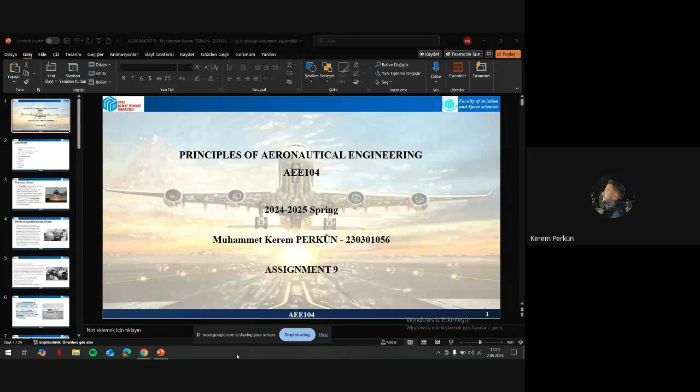Hello everyone, today I'm going to introduce the topic. My presentation covers the historical developments of aircraft propulsion systems, their classification, and the different types of engines used in modern aviation. I'd like to inform you about the style of my presentation. I wrote some specific information about the topic, but I won't read it directly, I'll try to summarize it.

If Kerem, there's no problem, we're just seeing the first page of the presentation. Yeah, I'm aware of it. If there's no problem, let's start with my content part.

Here is the topic that I will mention in the following pages. The first slide will be about the propulsion system. A propulsion system is essentially a machine that generates thrust to move forward. In aircraft, this works through Newton's third law: accelerating gas creates a reaction force to propel the plane, and the working fluid's acceleration through the engine produces this thrust.

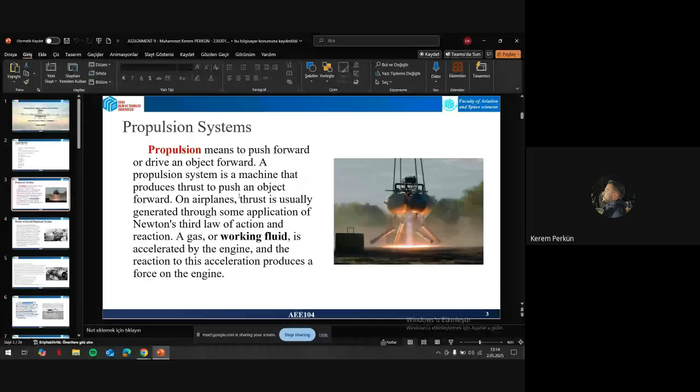Another part will be about historical things. In the early 19th century, powered flight seemed impossible due to inadequate power sources. Early attempts used clockwork and springs, later experiments used steam. Frederick Stringfellow's steam-powered model in 1868 was a key milestone, now preserved at the Smithsonian.

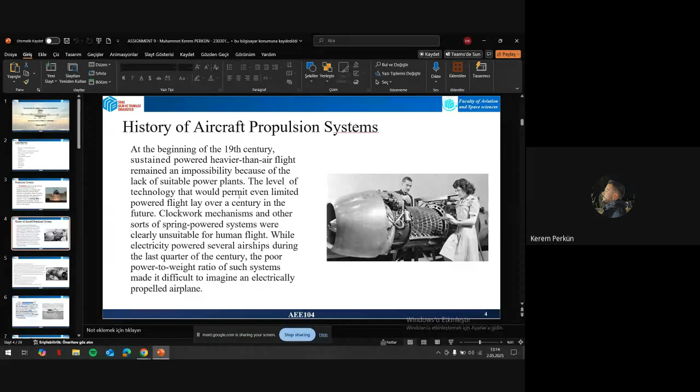Pioneers of flight, visionaries like Mozhaysky, Maxim, and others made early attempts with steam-powered machines in the late 19th century, while none achieved sustained flight. For example, Langley's 1896 aerodrome flew nearly a mile over the Potomac River, proving the concept's potential.

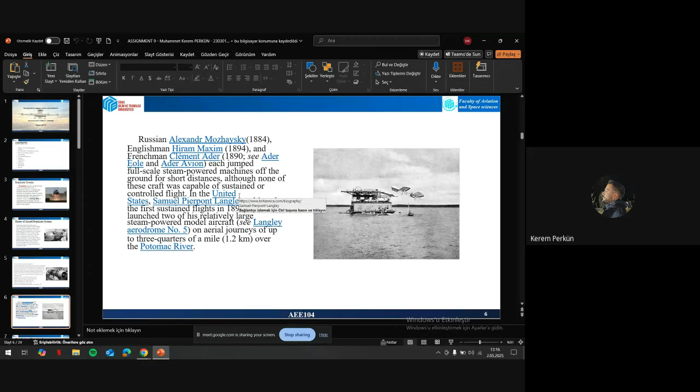And classification of... I'm hearing a sound spot, let me check, one minute. It has to be matched, Tarık actually. Hocam, any problem? I wasn't aware of it if there is one. What is the problem? Tarık says the slide isn't matched with my voice. I don't think it's matched, so right? I can see your slides and hear your voice neatly. Yeah, let's continue.

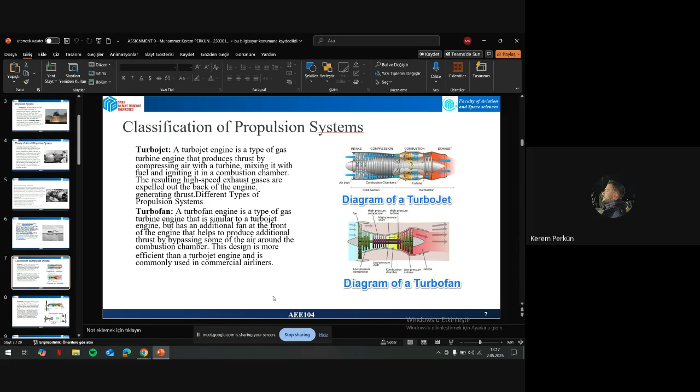The other part will cover ramjets, scramjets, and their classifications. Ramjets compress air using forward motion, working best at supersonic speeds. Scramjets take this further with supersonic combustion. Rockets differ by carrying their own oxidizer, making them essential for space travel.

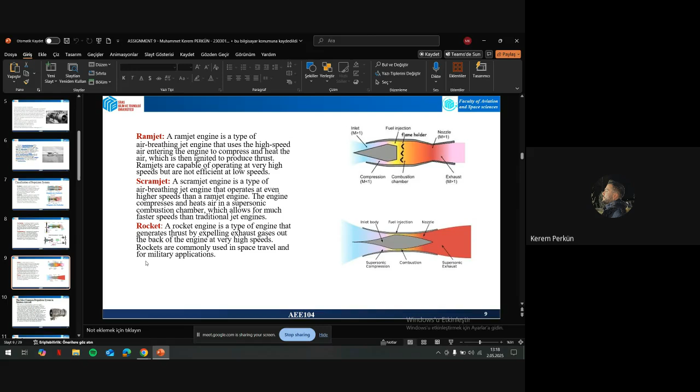Let's talk a bit about the work principles of the combustion chamber. I have a short video about it too, which I'll share after my talk.

First, high pressure air from the compressor enters the combustion chamber. Then fuel nozzles spray a mist of fuel, generally Jet A-1 or avgas - I'll mention what avgas is, by the way. Then a spark plug in a piston engine, or high temperature air in a jet engine, ignites the mixture. After that, the burning mixture produces high energy gases and spins turbine blades in the jet engine.

It generates thrust. Excuse me, Kerem, are you changing the slides? Because it's at least slide number 10 right now, are we okay? Yes hocam, okay, I'm talking about the work principles of the combustion chamber actually. Okay, but you're not showing the combustion chamber to us right now. I'm sorry.

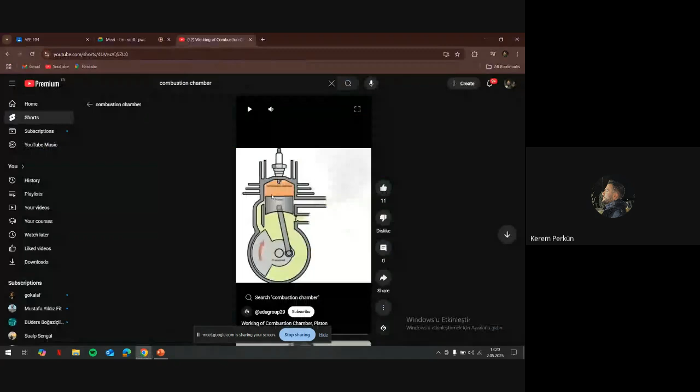You're still watching my screen, right? Yeah, I see a piston in here, and the cylinder. This is the combustion chamber. Let me explain it again if there's no problem.

First, high pressure air from the compressor enters the combustion chamber. Then fuel nozzles spray a fine mist of fuel, generally Jet A-1 or avgas. Then a spark plug in a piston engine, or high temperature air in jet engines, ignites the mixture. The burning mixture produces high energy gases that spin turbine blades in a jet engine, generating thrust, and push pistons in piston engines, rotating the crankshaft. Finally, hot gases exit through the exhaust system, creating thrust or expelling waste.

I just mentioned avgas, so I can explain it. What was that?

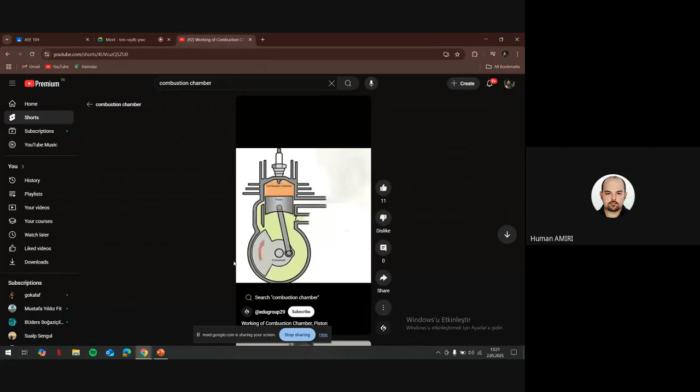Can I ask something here? What you're showing us is a piston engine, right? Is it a piston engine or not? It is a piston engine. So can you tell me if there's an aircraft using a piston engine, or what is the similarity of a piston engine to a jet engine? Can you explain that to us a little bit?

Piston engines actually rotate the crankshaft, but in jet engines it generates thrust. There's a fuel nozzle in the jet engine, and they also use some kind of fuel like jet A1 or aviation fuel. But if you're talking about the piston engine, there's a spark plug. Also in jet engines, they use high temperature air for igniting the mixture gas inside.

So what is actually the difference between a piston engine and a jet engine, in terms of - I don't know if you've taken thermodynamics yet. No, not yet. Okay, I don't have any specific idea of it, but I've just tried.

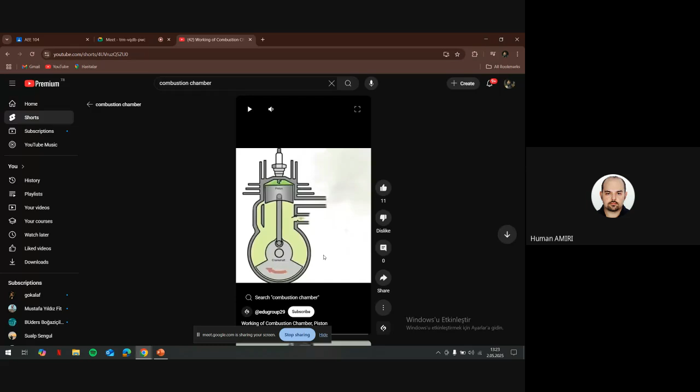So what kind of engine do we have in our automobiles? There are some similarities in car engines and aircraft engines. What are those similarities? Can you explain to us?

Yes, actually the other part of my slide will be about that. If there's no problem, I can continue with that. Yeah, continue. Okay.

Before I start, I want to talk about avgas, which I mentioned on the previous pages. So what was avgas? It's a kind of aviation gasoline that is specialized, a leaded fuel used in piston-powered aircraft engines. It has a high octane formulation, which makes it a bit dangerous for our environment.

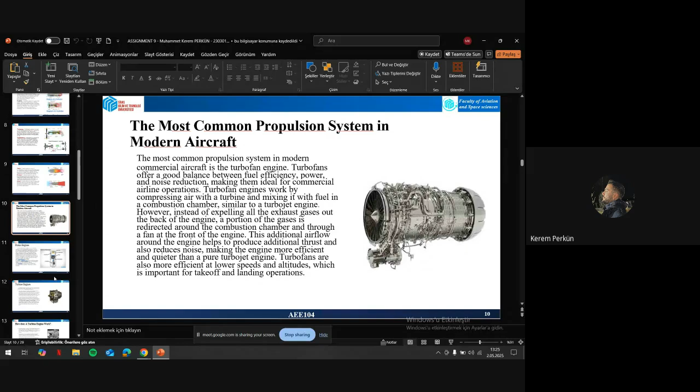Piston or reciprocating engines convert pressure into rotation, similar to car engines, but modified for aviation with dual ignition and air cooling. They typically use avgas and remain popular in light aircraft.

Turbine engines, or gas turbines, are internal combustion engines that continuously burn fuel. Their key components are the compressor, combustion chamber, and turbine, working together to convert energy into mechanical motion. The difference between a piston engine and a turbine engine is that a piston engine works intermittently, but turbine engines work continuously, right?

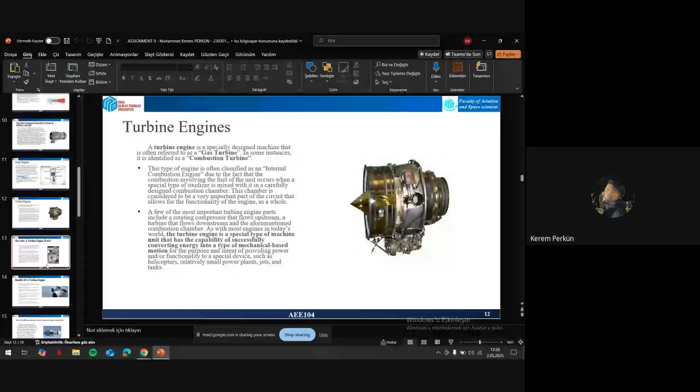Yes. Okay, what do we mean by intermittent working, intermittency in piston engines? Can you show us the slide of the piston engine, okay?

Slide number 11. In this slide you can see there's a cylinder, and inside there is a piston, and this piston is connected through a rod to the crankshaft, like in your automobile engine. There's an intake valve and an exhaust valve. The fuel and air mixture enters through the intake valve, and then with a spark from the plug, it burns and produces energy, which drives the piston to the lower part. When the piston comes to the lower part, it rotates the crankshaft.

Then by the action of inertia, the piston goes back to its first place, and by that time the exhaust valve opens and the burnt gases go out of the cylinder. But this happens intermittently. There's a part where the intake valve opens, air and fuel come inside, and the piston compresses it, then a spark, then expansion.

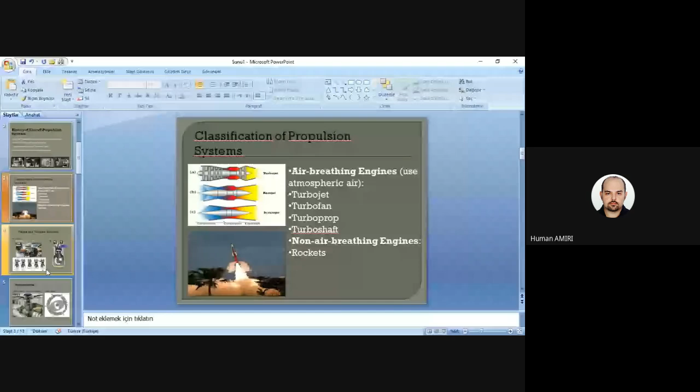Can you stop at slide number 3? Hocam, it remains actually how turbine engines work. If there's a part like this, he can continue with that.

Okay, now I will ask some questions. The first question I have on this slide is about the classification of propulsion systems. So what do you actually show to us right now? Can you explain this slide to us?

Yeah, of course. This slide shows the types of propulsion systems, like air breathing engines and non-air breathing engines. In this slide we see turbojet, turbofan, turboprop, and turboshaft. I'll explain all of them in the next slides.

But for the rockets, like a non-breathing engine, the rocket has its own... how can I say it... one second.

So the rocket, what do we mean by air breathing and non-air breathing? Can you explain? Air breathing means the air comes from outside into the engine and goes with the fuel into the compression and combustion chamber. That's what air breathing engines mean.

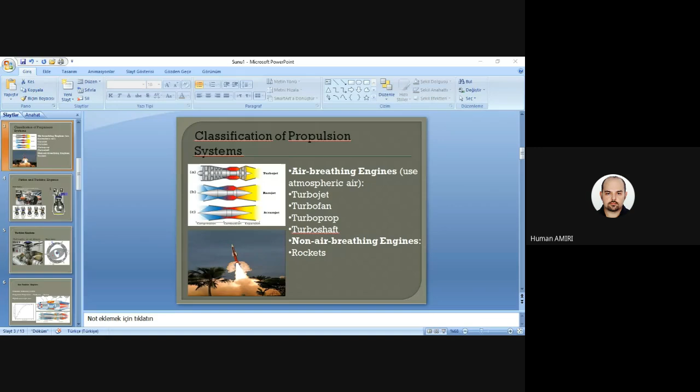They do not have any rotating parts inside them. In a turbojet engine, the parts that rotate belong either to the compressor at the front of the engine, shown by the compression section in this slide, or to the turbine, which is after the compressor. You see a red part, which is the combustion chamber. After the combustion chamber, you see two stages of turbine blades. So at the front part of the turbojet engine, you see a number of stages of compressor blades, and at the back part, you see turbine blades.

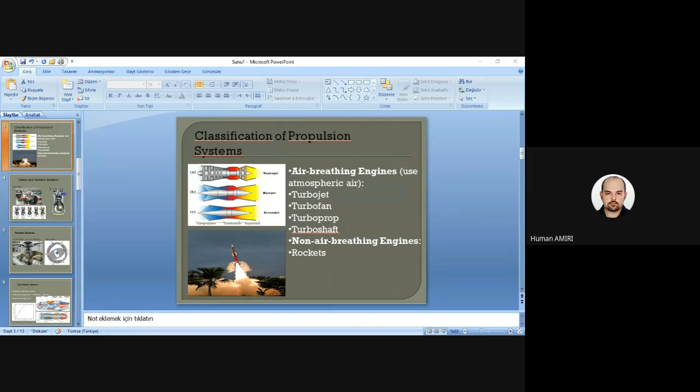Turbine engines are used in helicopters also, like rotary motion.

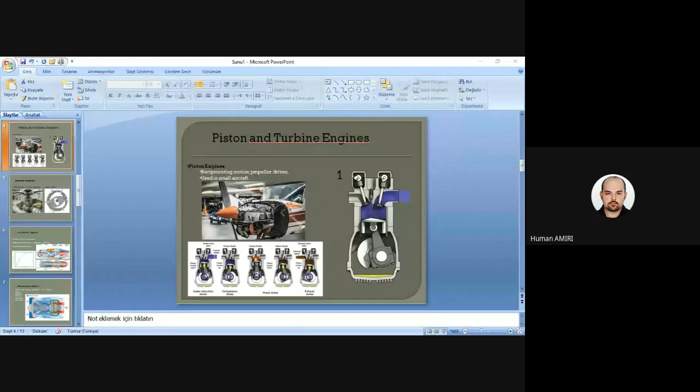Okay, can we go to slide number 5? So you're showing us a helicopter blade, right? But you said that in helicopters we use turbojet engines, right?

In helicopters, I don't know, turbine engines operate like... I don't know, I don't have any idea.

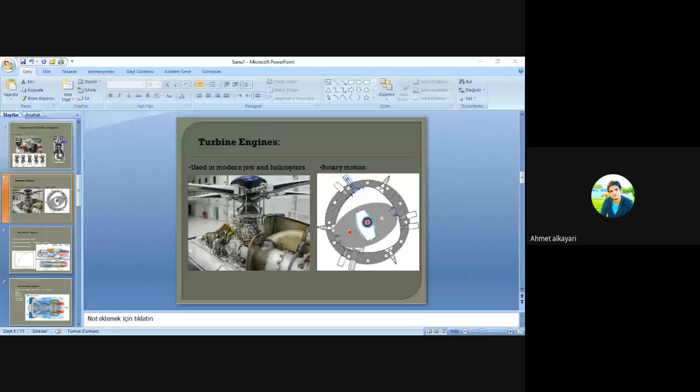So helicopters do not use reciprocating engines, because the power that the blades of helicopters need is beyond the power that can be generated from the reciprocating piston engines. That's why you have to use jet engines. But it's not jet engine, you have to use turbine engines.

It is a kind of turbine engine where you completely translate all the kinetic energy inside the combusted fuel and air to shaft power. For the helicopter, you have to use shaft power. When you have a turbine engine that delivers all the power to the shaft, you don't call it a turbojet engine, you call it a turboshaft engine.

That's correct, like in the last slide I explained about the helicopters. Okay, go to slide number 6, please. Let's see what you have in there.

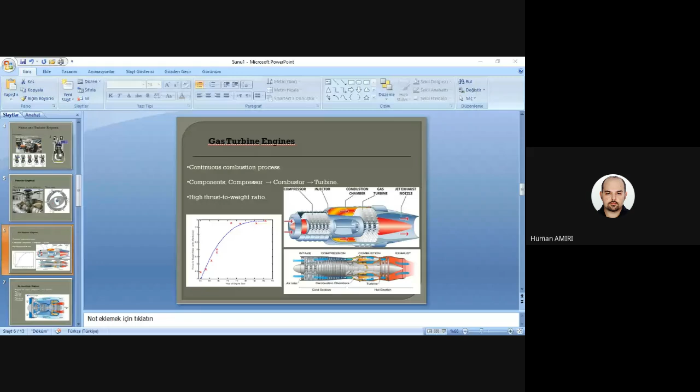Can you see, sir? There's a problem. So these are the types of air breathing engines. The first one is turbojets, and the second ones are turbofan, turboprop, and turboshaft.

Do you know what these are? What is turbojet, what is turbofan? We explained turbojet just a while ago. For turbofan, I think... what is it like? The picture you are showing here, what is it? Is it turbojet or is it turbofan?

The turbofan is most commonly used in modern airplanes. It combines a large fan at the front with the jet engine core, giving both high power and good fuel efficiency. This picture, which one of them is it - turbojet, turbofan, turboprop, or turboshaft? I think it's turbofan.

You think, or are you sure this picture is a turbofan? Yes, I'm sure it's a turbofan. Can you explain why? In a turbofan drawing, the air doesn't go directly into the engine. About 80% of the air goes around the engine, and 20% goes through the engine.

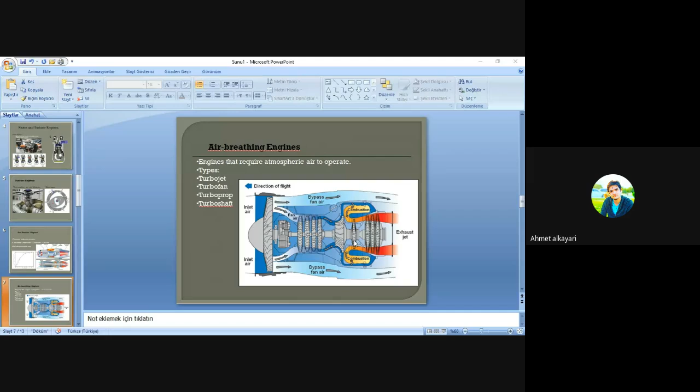Okay, and when it is burnt, it will pass through some other blades. Can you show us this, after it is burned? Before these three sets of blades, there is another one here - this one is a turbine. This one? Yes. This one is also a turbine blade. After this one set of turbine blades, you see three more sets, three more stages of turbine blades, right? Right.

What do these turbine blades actually do, do you know? Like push the gas out of the engine. No, not actually, they don't push anything. The gas that enters the turbine blade already has very high kinetic energy, so this high kinetic energy rotates the turbine blades. Okay, and when the turbine blades are rotated, because turbines are connected to the compressor blades through a shaft at the center, they will rotate the compressor blades as well.

Kinetic energy gas coming out from the combustion chamber enters the turbine blades and rotates them. Because the turbine blades are connected to the compressor blades through the central shaft at the center of the engine, the compressor blades will rotate. When the compressor blades rotate, they take air from outside and compress it to make it ready for combustion. That's why this engine works continuously without stop, and that's why we call it a turbojet engine, or turbofan engine in this case.

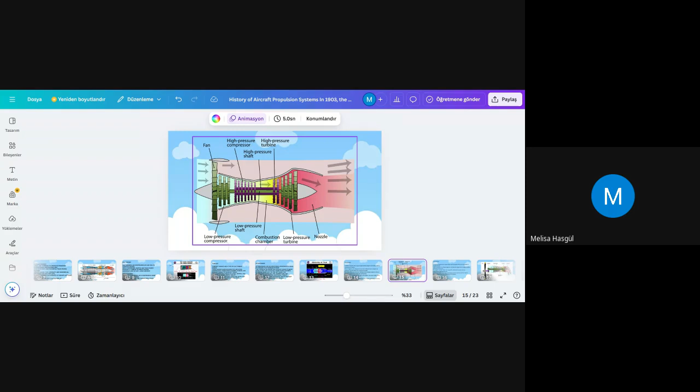Slide 4, slide number 4. Which one is turbofan in slide number 4? Actually, it should be one more—slide 15. Sorry, hocam. What did you say, hocam? Were you asking about the fan? The difference between turbojet and turbofan: turbofan has a big fan in front, as you can see. It is more efficient, less noisy. It is usually used in commercial aircraft, Airbus, Boeing.

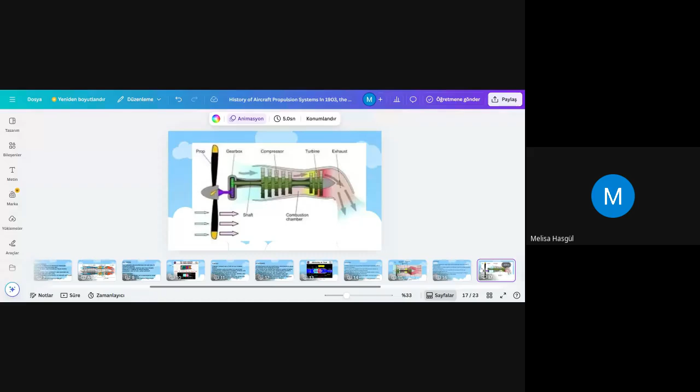Yes, hocam. So can you show us a turboprop engine or turboshaft engine as well? Slide number 17. It's turboprop. Turboprop engine turns a propeller, but with a turbine. It's good for short flights, usually middle-sized aircraft. So it still has a gas turbine.

Can you tell me what is a gas turbine in this slide? But we are seeing some different parts. Okay, like you are showing us a propeller, right? Can you show us the propeller? Then there is a gearbox connected to the propeller. Okay, and this gearbox is connected to what? The gearbox is connected to the compressor, right? Yes, this green part is called the compressor.

And this compressor is connected to something else, called the turbine, at the back of this engine. Can you show the turbine with your mouse? This is the turbine. After the turbine you see the exhaust—the burnt gases will go outside the engine through the nozzle. So a gas turbine is composed of compressor, combustion chamber, and turbine. We call these three together a gas turbine, right? When this gas turbine is connected to a propeller, like what Melisa shows us, we call it a turboprop engine.

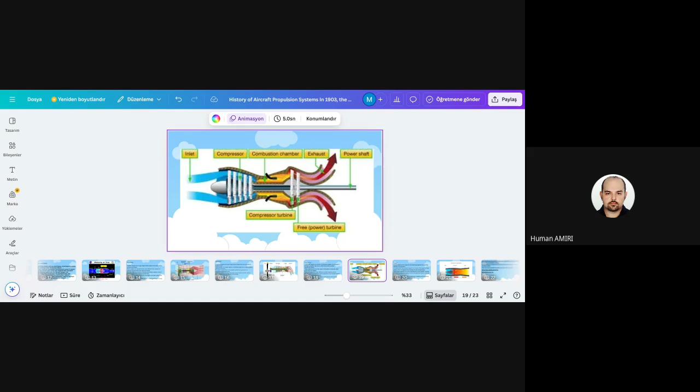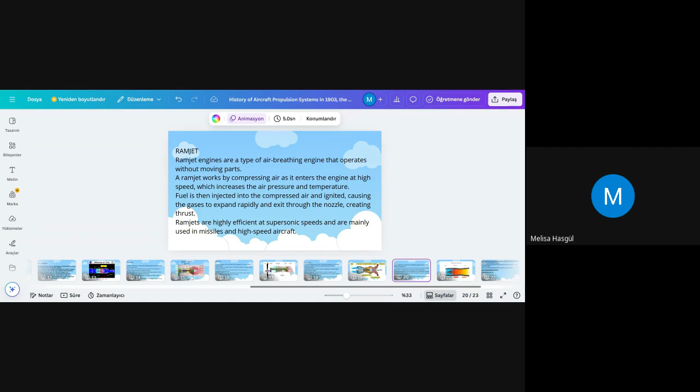For example, slide 20. Slide 20 is good, go to 20. Ramjet engine is a type of engine that doesn't have moving parts. If you want, I can see from here what are the moving parts that you said.

The moving parts inside the turbojet engine. What are those, like propeller? No, not propeller. In a turbojet engine, go back to the turbojet engine. Which slide was it? Turbojet.

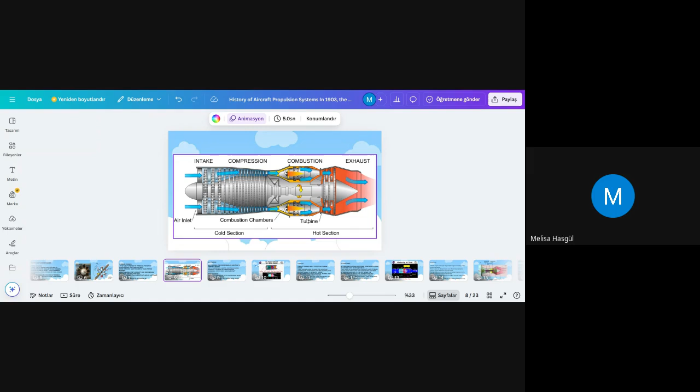Which one of these are moving parts? From the left to right, air will go inside the engine. Is it the turbine? Turbine is rotating, turbine is moving, and turbine is actually connected to the compressor. These are all compressor blades. So we have two sets of blades rotating, moving inside the turbojet engine - compressor blades and turbine blades.

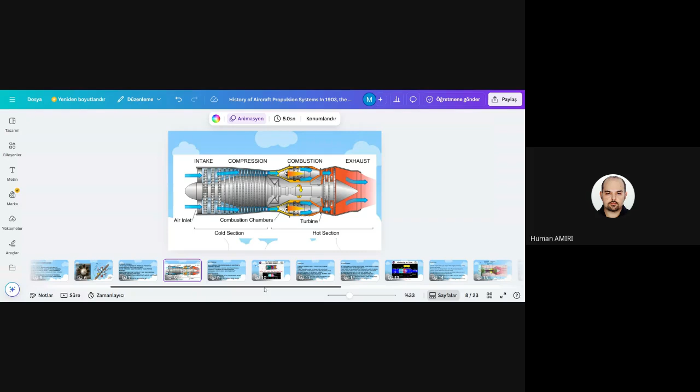There is one problem with the ramjet engine - it doesn't work at low speeds. Exactly, ramjet cannot work at low speeds. It cannot work when you are on the ground. It cannot be used to take off the aircraft. The ramjet engine has no static thrust - you cannot make thrust force from zero by using the ramjet engine.

This is bad about it, but the good thing is it doesn't have any rotating parts, so you can use it at very high speeds without any problem, because the action of compressing the air happens with the ram effect of the air in ramjet engines. You will see the details of these in your propulsion course, but I just want to mention the different kinds of engines to you. These are the basic things you have to know about the engines.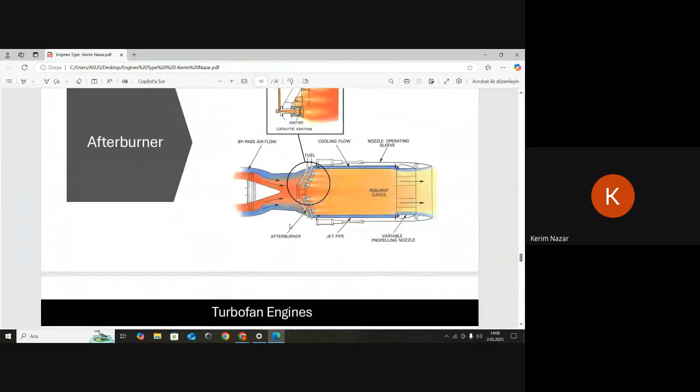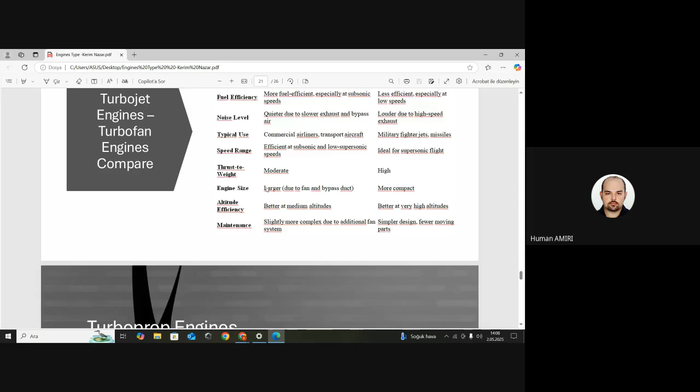Okay, afterburner, I asked Melissa one question. Can you answer that question? Scramjet engines? What are scramjets? I don't have any idea. You don't have any idea. I researched just ramjet engines.

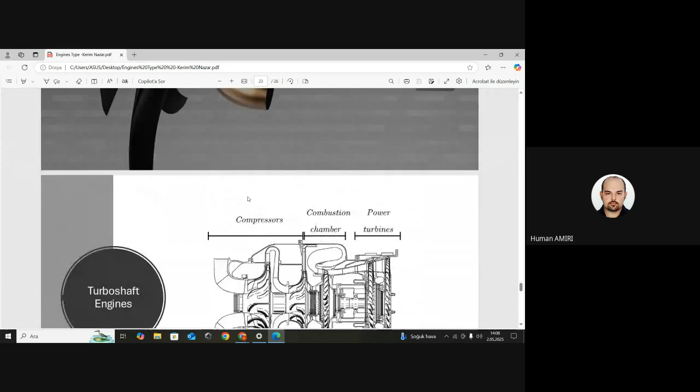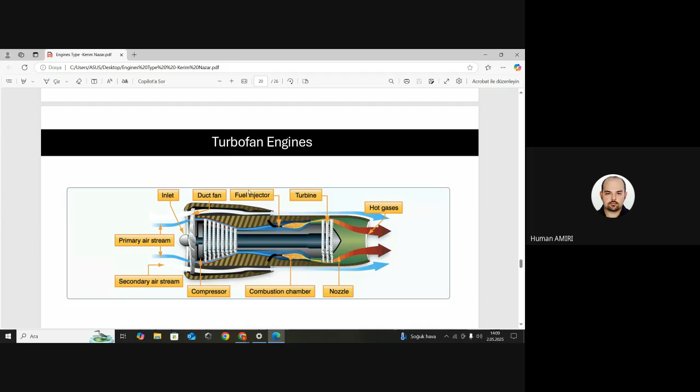The one thing that I really like about this presentation from Kerim is that he didn't put too much text. He only put figures and photos, and as big as possible. This is a very good presentation. Thank you, Kerim, for an online presentation.

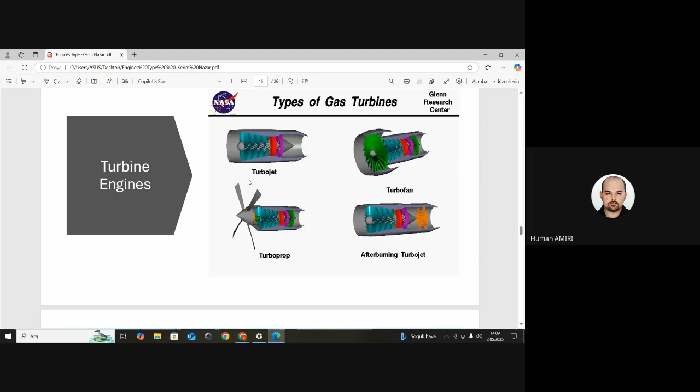Let's go to the top of the presentation and go slide by slide. Firstly, we can start with the aero piston engines. Piston engines will start with the Wright brothers' first powered flight. The first powered flight in history was made by Wilbur and Orville Wright on December 17, 1903.

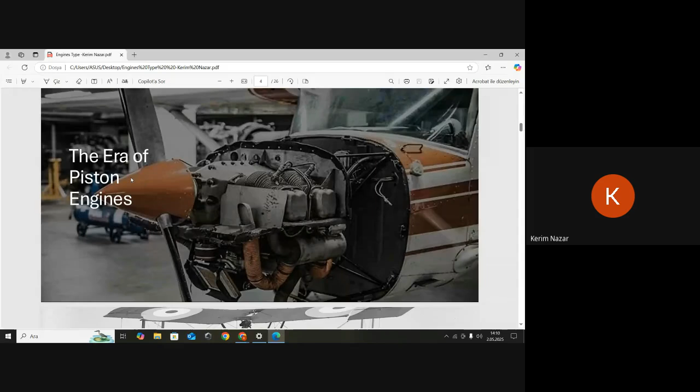This aircraft is the Wright Flyer. The Wright Flyer was powered by a 12 horsepower, 4-cylinder gasoline engine. In fact, gasoline engine is a type of piston engine, because the piston engine used gasoline to work.

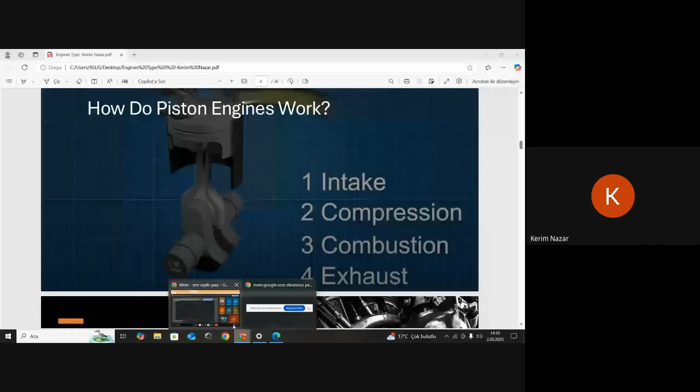To show how piston engines work, a video for you. If we look at the steps: first step is intake, second step is compression, third step is combustion, and fourth step is exhaust.

Yes, could you please leave the link for this video in the messages so everybody can go over the video after the course? This is good for us. Just leave the link for us. Thank you, okay, go on.

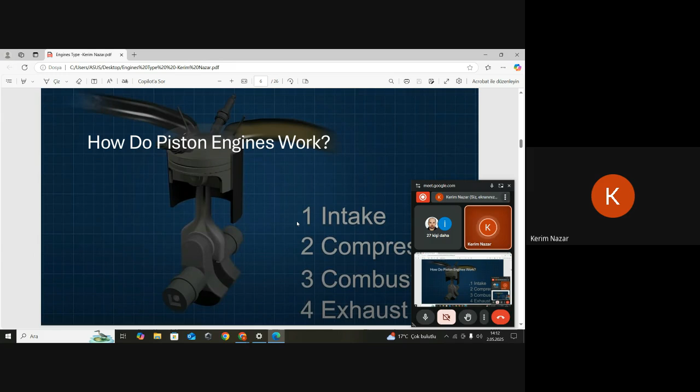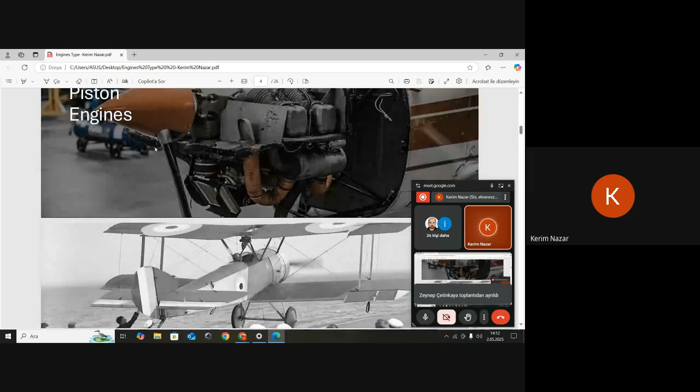The most well-known gasoline and diesel engines today are internal combustion piston engines called four-stroke engines. In fact, piston engines are used in cars or aircraft, but there are some differences between the two situations. For example, V-type or radial type — piston engines have a lot of types: radial engines, inline engines, and supercharged.

I will explain radial engines in this part. A major advancement in piston engines came with the development of the radial engine, where cylinders are arranged in a pattern around the central crankshaft. The aim of radial engines is increased power. Radial engines allow for higher power output relative to their weight, which was critical for early aircraft that needed power for flight.

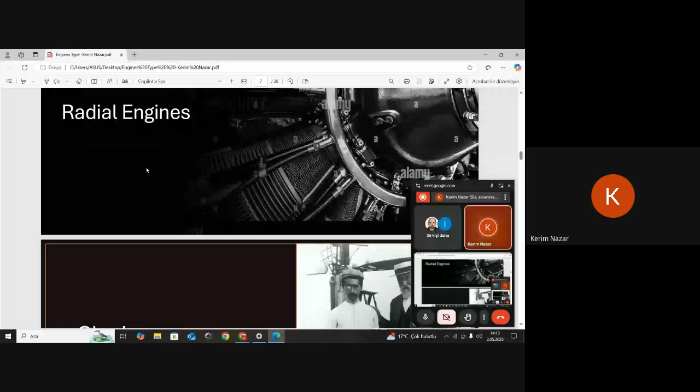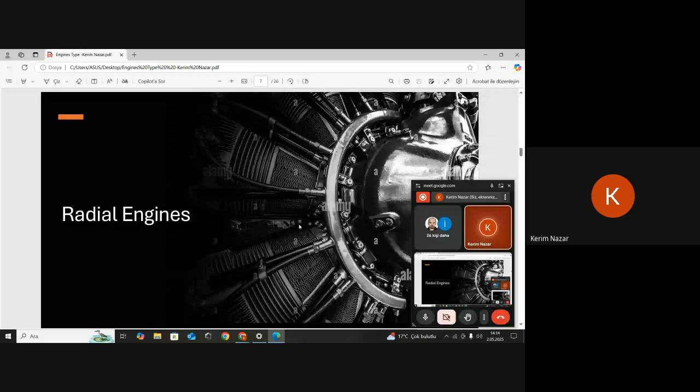Also, these engines have good durability and cooling because they allow for better natural cooling airflow in a radial pattern, since they are positioned in front of the aircraft, which compresses the airflow directly.

Also, in 1901 the radial engine made its appearance. American engineer Charles Matthews Manley converted one of Stephen Balzer's unsuccessful rotary engines into a water-cooled five-cylinder radial engine. Manley subsequently installed this engine in Langley's Aerodrome A and was able to produce 52 HP at 950 RPM, a significant improvement over the 12 HP and 1025 RPM of the Charles Taylor engine used on the Wright Flyer.

Let's move on to inline engines, where cylinders are arranged in a single row. Prominent in the 20s and 30s, these engines were typically more aerodynamic than radial engines due to their compact, streamlined shape.

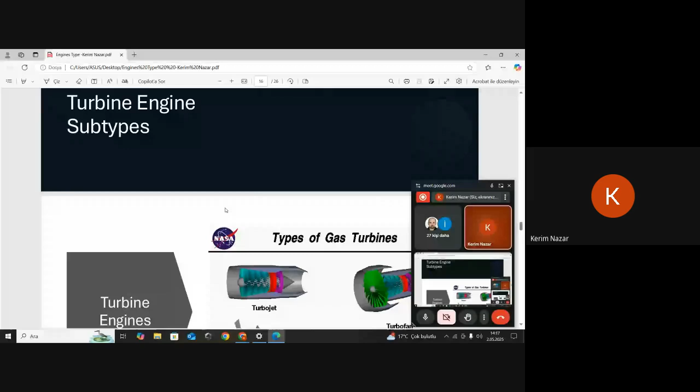Okay, let's continue to the jet engines section of the slides. If you look at jet engines, first we take turbojet engines. Turbojet engines were the type of jet engine developed that played an important role in aviation history, particularly in military aircraft and jet-powered aircraft.

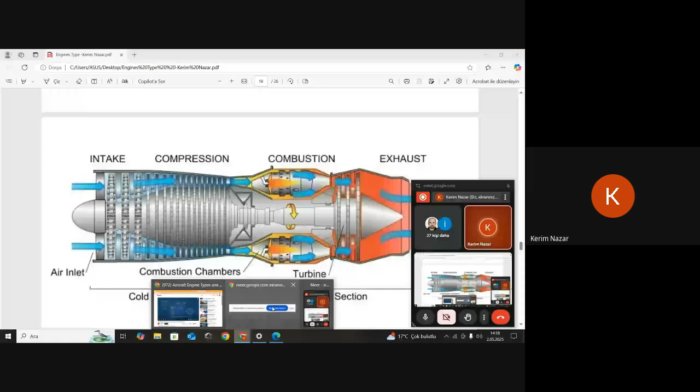Operating principle: air intake, compression, combustion and exhaust. I want to show a short video for you.

In this part, intake airflow, then compression, then combustion and turbine. I will explain separately: air intake — air enters the engine through a high-speed inlet. After that, compression — air is compressed by an axial or centrifugal compressor, increasing its pressure and temperature. After that, combustion — compressed air is mixed with fuel in the combustion chamber.

In the combustion chamber, ignition produces high temperature, high pressure gases. This high pressure gas exits and expands, causing the turbine to spin. The turbine is connected to the compressor by a shaft, which drives the process.

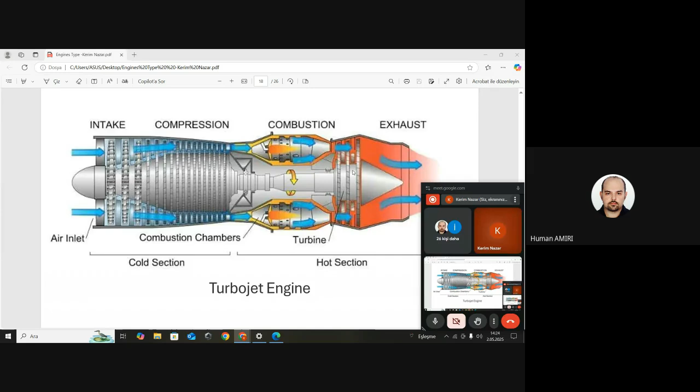So didn't you see an aircraft taxiing on the runway? Did you see in the movies or somewhere aircrafts taxiing on the runway? There are kind of pushback trucks that take the aircraft backwards. Have you seen them so far or not? No? Okay, there are some pushback tractors that push your aircraft backwards. They can push your aircraft backwards.

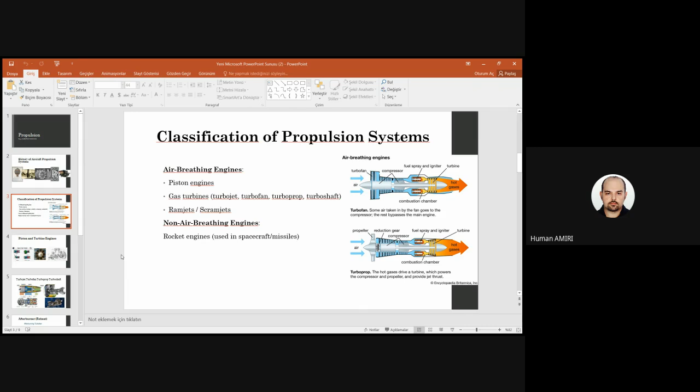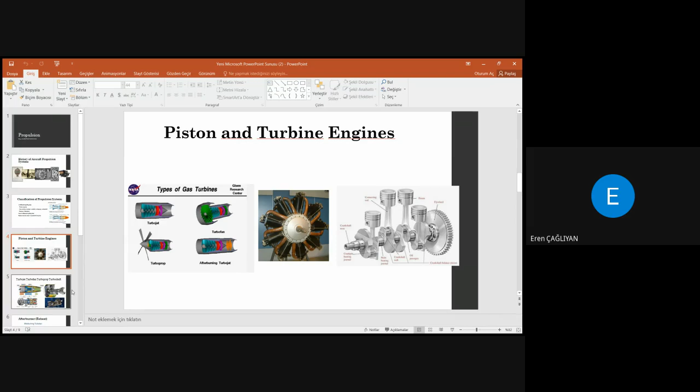Can you tell us a little bit about afterburner? What is afterburner? We have one page about it here.

We are using afterburning to increase the thrust. We are spending extra fuel at the nozzle part.

Can you show us the nozzle in this slide? Where is the nozzle? No, that's not the first nozzle. The first nozzle is here - yeah, there, this is the first nozzle.

Okay, go to slide number 5. In this slide, the first nozzle - can you show us the first nozzle here? Yeah, we are seeing it here. This is the start of the nozzle, and then the gases will go outside. This is a nozzle.

Okay, so the same thing - if you go to slide 6, you can see the same thing. Until here, this is the first nozzle. After this nozzle, you will have some pipes, and these are injectors for the afterburner.

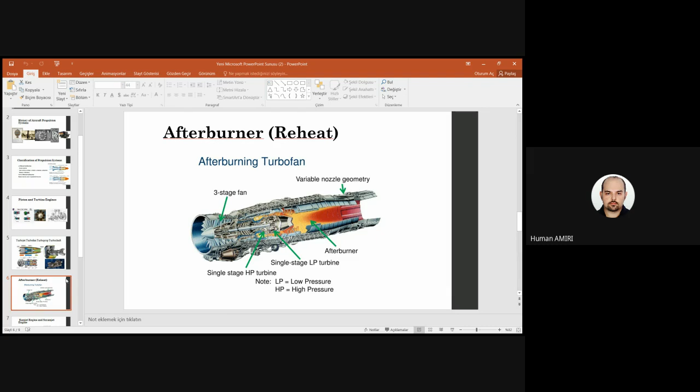6, 7. This is a good slide. So perhaps right now you can tell me what is the difference between ramjet and scramjet.

From the left, what are you seeing? A ramjet engine, right? We are producing more energy thanks to this engine because we don't use any plate, blade, or fan. There are no rotating parts inside this engine, the ramjet engine.

So what is a scramjet engine? I don't understand, a scramjet engine. This is a ramjet engine at the left, and at the right you're showing us a scramjet engine. What is a scramjet? We are using supersonic speed in scramjet. Inside the combustion chamber of the engine, the combustion happens at supersonic speed.

Okay? Yes. Normally for combustion, what does it mean? Mixing fuel and air and burning it. It happens inside the combustion chamber. So for good combustion, normally we have to reduce the speed of the air to mix it properly with the fuel, because if it is very fast, the air does not have appropriate time to mix with the fuel.

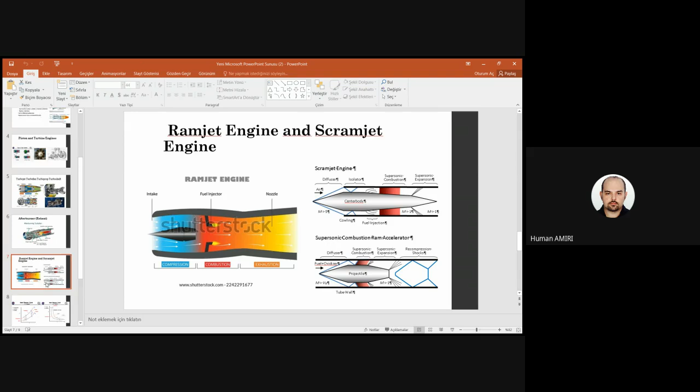So thank you, Eren, for giving this to us. But right now, I guess we don't have any time to go over this. So you will see it in thermodynamics. You can memorize the name Brayton.

It's a Brayton cycle. So do you know which cycle is related to piston engines? What do we call a piston engine cycle? No, this is again the Brayton. The 4-stroke engine that we have in our cars as well - is it again the Brayton cycle, or do we call it something else?

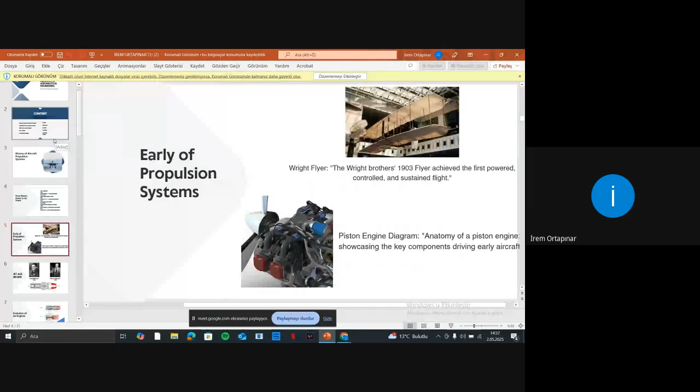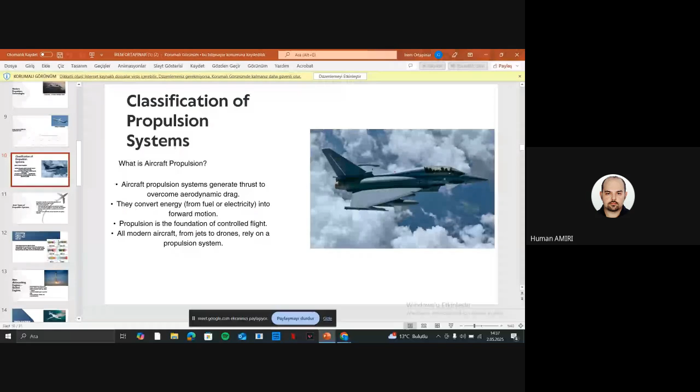I divided the history of aircraft propulsion systems into parts, and these are the parts of it. So what do you have for modern technologies? What are those modern technologies? I have Eviation's Alice, an all-electric passenger aircraft. It's a great example of modern propulsion technologies - the next generation of green flight. Innovation in electric motors and battery technology are setting the stage for quiet, clean, and efficient air travel, and it's the biggest example of modern propulsion technologies.

So they do not use any fuel inside their aircrafts, right? What, do they use? Is it all electrical? I think it should be because it's an all-electric passenger aircraft. So there's no fuel, I think.

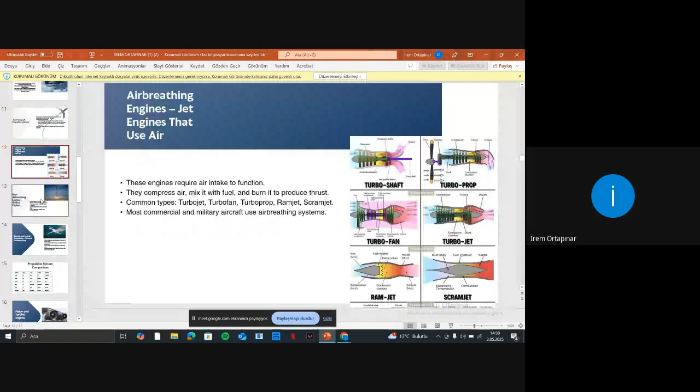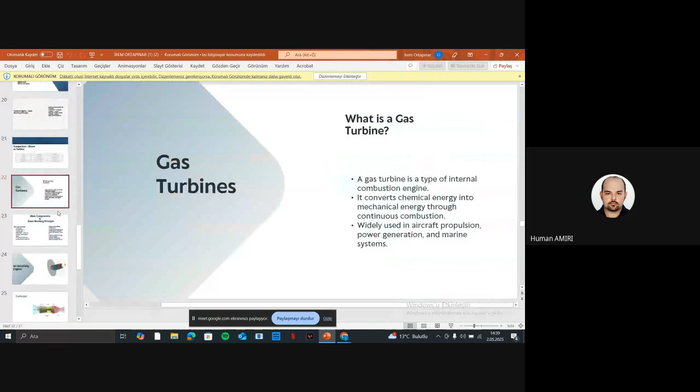Classification of propulsion systems, types of engines. We already talked about piston engines. Okay, gas turbines. How does it work inside a gas turbine? And then airbreathing engines, and I can summarize one by one, working principles.

Let's wrap it up like this. So, turbojet, you can see it here. In turbojets, air enters the intake and is compressed by compressors. Fuel is added in the combustion chamber and ignited. The resulting high-speed exhaust gases pass through turbines and exit through the nozzle to create thrust. We usually use turbojets in old military jets.

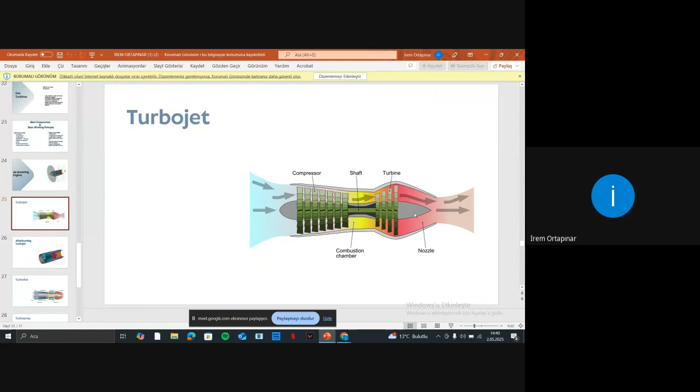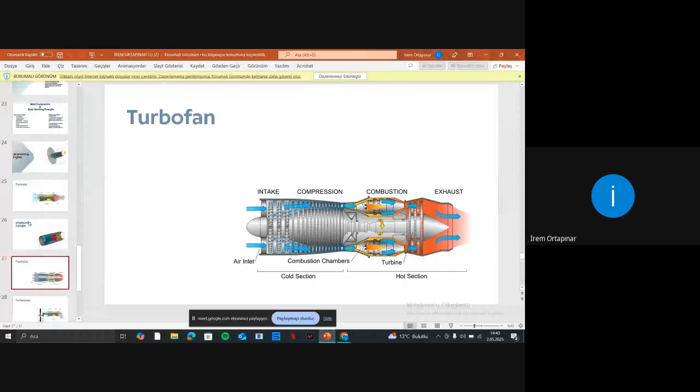The difference between turbofan and turboprop is that turbofan uses a jet fan, while turboprop uses a propeller. That's the difference between them.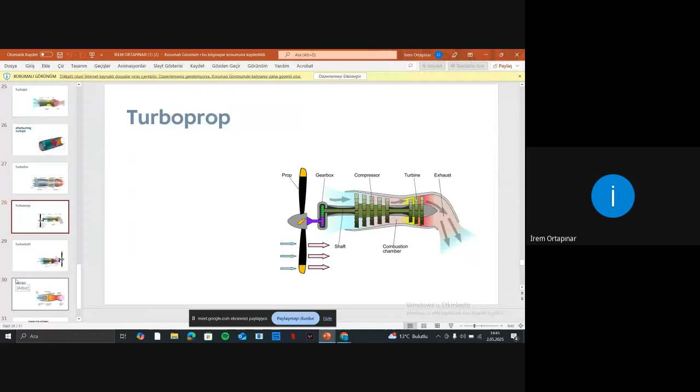Turboshaft and ramjet, finally I have. Where do we use the turboshaft? We use turboshaft usually in helicopters. Exactly. And finally I have ramjet.

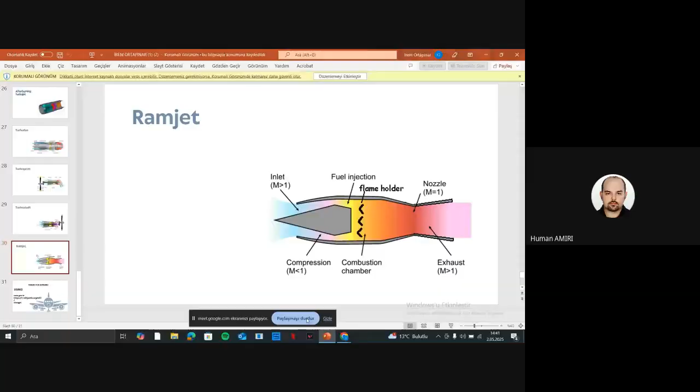And the source, okay. Thank you, you're welcome. And finally we will have Yusuf. Okay hocam, shall I start? Yeah, of course, okay.

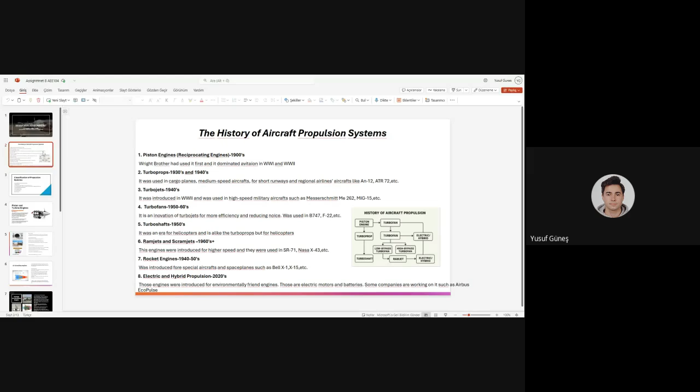Okay, can you see my presentation? Yes, we can see, please go slide by slide. First, I started with the history of the aircraft propulsion system. Next slide, then the classification of propulsion systems, there are two features. Then I start with piston and turbine engine.

Turbine engine, types of turbine engine, how do they work? Then turbojet, afterburner, turbofan, and what is bypass ratio?

What is bypass ratio? Bypass ratio is the ratio of... I want to tell here is air is sucked, and the air goes from here and bypasses the core, and the ratio of this is called bypass ratio.

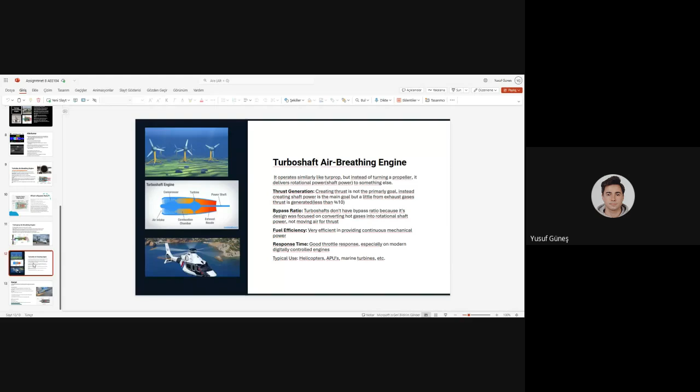Yes, exactly. Then turboprop, turboshaft, and plus one is ramjet. Is that all? Yes, this is all my presentation.

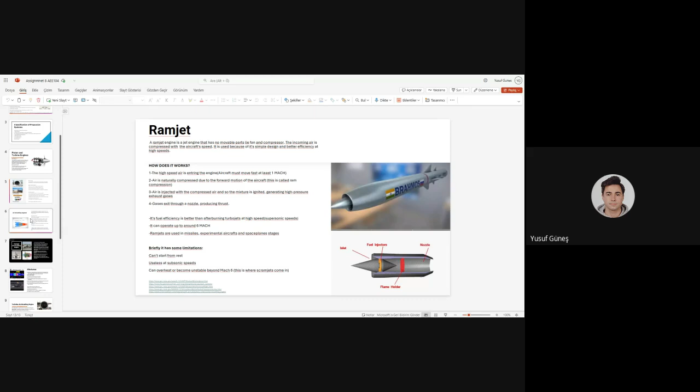If you want any specific slide... So I want to ask, can you tell me what is a gas turbine? What is a gas turbine? I didn't research gas turbine, but I'm listening to you. Gas turbine is... it's anywhere here in the middle of the engine, I guess. Yes, exactly, thank you very much.

It starts from the compressor, and then combustion chamber and turbine. So when you attach these three together, you will call it a gas turbine.

So when this gas turbine becomes a turbojet engine, when you attach a nozzle at the back of the turbine, right here, if you attach a nozzle at the back of the turbine, you will make a turbojet engine.

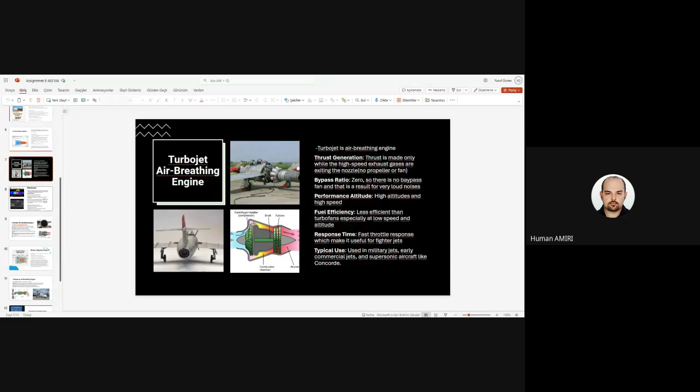So if you attach a fan at the front of the turbojet engine, you will get, I guess, a turbofan engine. I guess you understood somehow the differences between these jet engines and the whole idea of the propulsion of aircraft. So thank you, thank you very much.